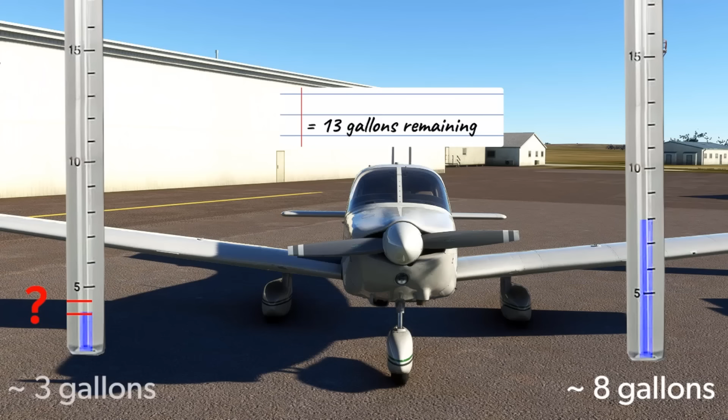Now, with no other airports within comfortable fuel range, they'll have to find a way out of this mess. None of their options are very good. Each one adds potential risk or a long delay to this trip. Let's jump into the scenario now, take a look at the different options this pilot has, and let you decide their fate.

You picked up skiing as a winter pastime in your hometown of Red Wing, Minnesota. The bluffs overlooking the Mississippi River provide a scenic enough view, but today you and your spouse will set your sights higher and head to Wyoming for a week-long getaway. You pack up the Piper Archer and depart early Friday morning with a plan to get to Sheridan before sunset.

You'll split the 650-mile journey into two legs. First, you'll fly west for about 4 hours and find somewhere to land and top off. Then it'll be a shorter leg to Sheridan with even more comfortable fuel reserve that you'll appreciate in the more remote territory. You take off, climb to 6,500 feet and head west. Every hour, your GPS reminds you to switch tanks. With a headwind averaging about 15 knots, you travel 390 miles in just shy of 4 hours and end up landing in Philip, South Dakota.

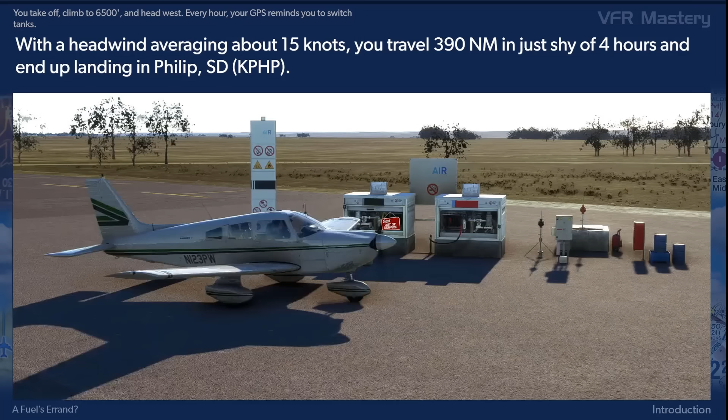You taxi up to the self-serve 100 low-lead pump, hop out, and are met with an out-of-service sign. Maybe that's why the only airplane you see on the ramp is a decrepit Antonov AN-2 that looks like it was tied down in 2004 and hasn't moved since. Inside the FBO, the airport manager informs you that the pump stopped working this morning, and for all he knows, it might not be fixed until next Monday. His call for repair services from Rapid City went to voicemail, and it's over an hour away by road.

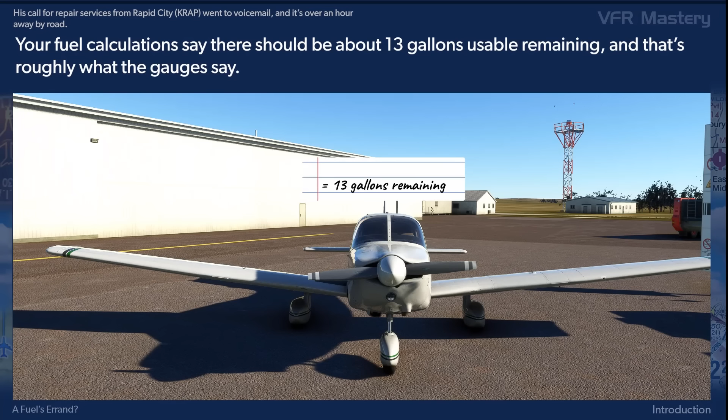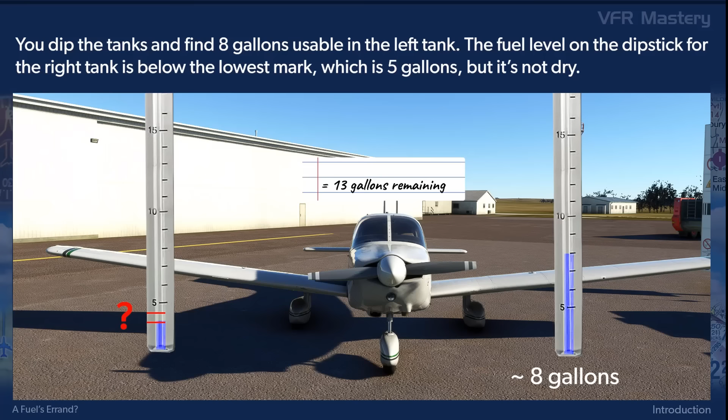Your fuel calculations say there should be about 13 gallons usable remaining, and that's roughly what the gauges say. You dip the tanks and find 8 gallons usable in the left tank. The fuel level on the dipstick for the right tank is below the lowest mark, which is 5 gallons, but it's not dry. You figure that's at least 3 usable in the right.

Rapid City is 65 miles ahead against a 10-knot headwind, so you wouldn't have a legal, let alone smart, fuel reserve. Pierre, South Dakota is 60 nautical miles in the wrong direction, but with a slight tailwind component. ForeFlight says you could get there in 30 minutes and 5.5 gallons.

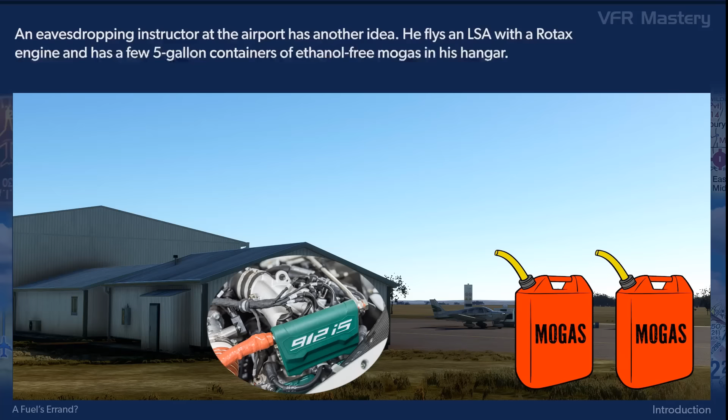An eavesdropping instructor at the airport has another idea. He flies an LSA with a Rotax engine and has a few 5-gallon containers of ethanol-free MoGas in his hangar. He'll sell you 10 gallons if your Archer has the AutoFuel STC. You tell him it doesn't. No matter, he says, it's just a paper STC, and they don't actually change anything in the engine or the fuel system. And autogas mixes fine with 100 low-lead.

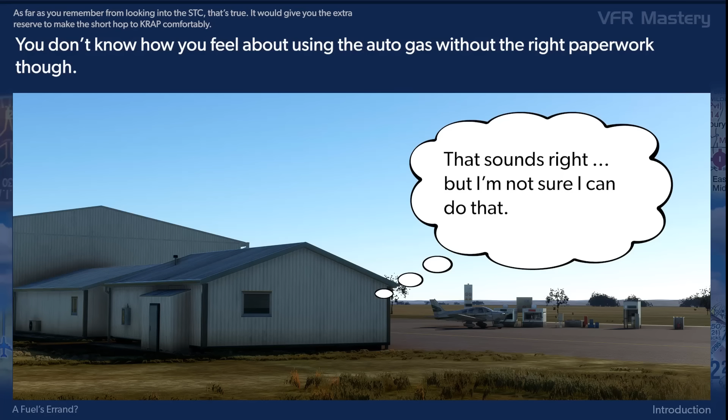As far as you remember from looking into the STC, that's true. It would give you the extra reserve to make the short hop to Rapid City comfortably. You don't know how you feel about using the autogas without the right paperwork, though. There's enough 100 low-lead on board to make Pierre with a legal reserve, but juggling between the left and right tanks is tricky. You say you wish you had taken the 172 with a both position, and the instructor suggests another workaround. He offers an empty container to transfer those 3 gallons to the left tank.

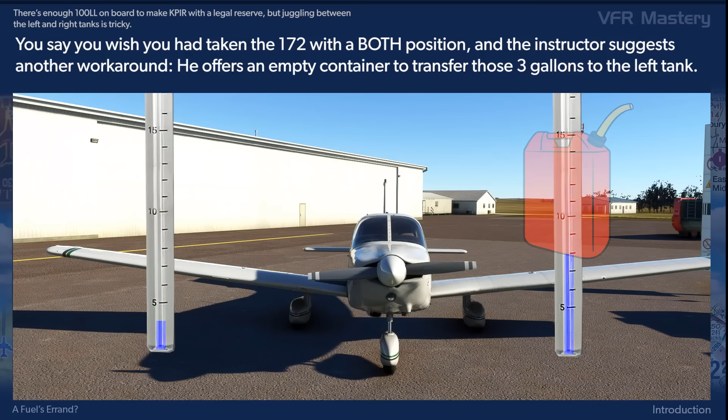Then again, if he has 2 empty 5-gallon containers, maybe you could borrow those and rent a car for the 3-hour round trip to Pierre to get 10 gallons of avgas. What will you do? 1. Fly to Pierre. Use the left tank alone. 2. Fly to Pierre. Take off on the left tank, switch to the right tank for cruise or until it runs dry, switch back to the left for descent and landing.

3. Transfer all your fuel to the left tank. Fly to Pierre on the left tank. 4. Buy 10 gallons of ethanol-free autogas, then make the short flight to Rapid City to top off with 100 low lead. 5. Borrow 2 5-gallon cans, rent a car, and drive to Pierre to buy avgas, or wait for the pump to be fixed. Analyze the resources and make your choice.

Okay, so which option did you choose? Let's see what Paul Bertorelli would do. Paul is a well-known aviation journalist and a highly accomplished flight instructor with decades of experience.

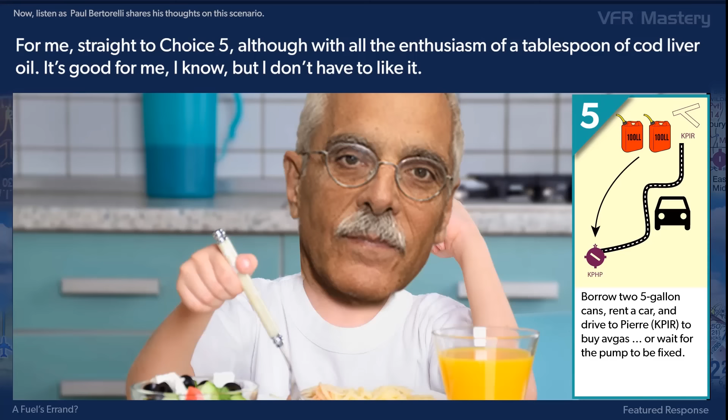Now listen as Paul Bertorelli shares his thoughts on this scenario. For me, straight to choice 5, although with all the enthusiasm of a tablespoon of cod liver oil. It's good for me, I know, but I don't have to like it. But there's a virtuous point to be made here, and I will get to it a little roundabout by first dismissing the other choices. Choice 1 makes no sense.

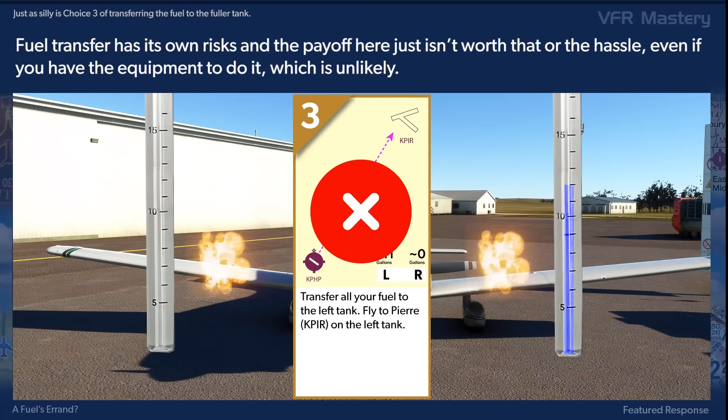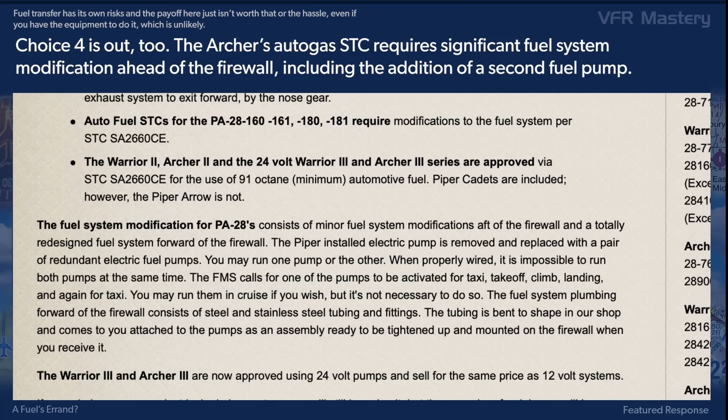Not using fuel aboard the airplane because you're worried about the tank running dry is irrational. Just as silly as choice 3 of transferring the fuel to the fuller tank. Fuel transfer has its own risks, and the payoff here just isn't worth that or the hassle, even if you have the equipment to do it, which is unlikely. Choice 4 is out too. The Archer's Autogas STC requires significant fuel system modification ahead of the firewall, including the addition of a second fuel pump. There's a reason for that, and it's probably related to vapor lock issues.

So on to choice 2. Fly to Pierre by launching on the fuller left tank, switching to the right and running it dry before completing the trip on the left tank. Seems like a perfectly reasonable and eminently doable strategy, so why not pick it then? The problem is no margin for error, or at least very little.

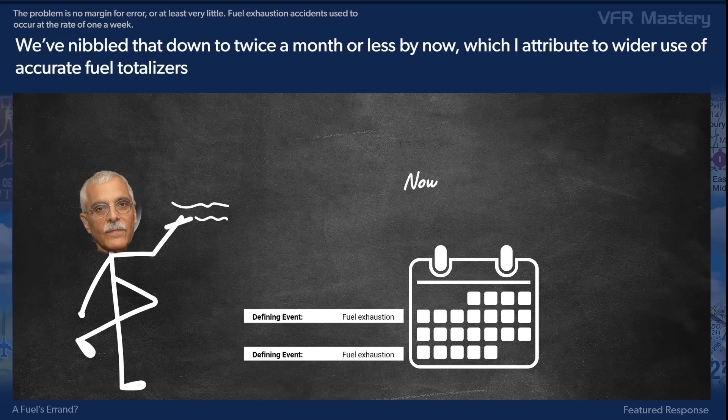Fuel exhaustion accidents used to occur at the rate of 1 a week. We've nibbled that down to twice a month or less by now, which I attribute to wider use of accurate fuel totalizers and the penetration of apps into the flight planning process, resulting in more accurate fuel awareness. All good, but the same garbage in, garbage out caution that applies to computers applies to totalizers and apps too.

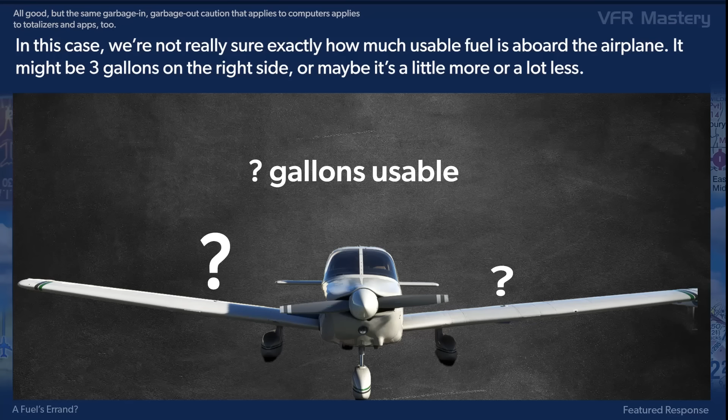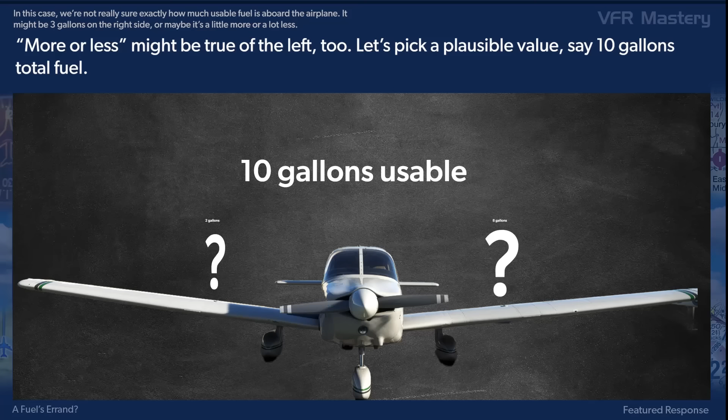In this case, we're not really sure exactly how much usable fuel is aboard the airplane. It might be 3 gallons on the right side, or maybe it's a little more or a lot less. More or less might be true of the left, too. Let's pick a plausible value, say 10 gallons total fuel. ForeFlight says the Archer will need 30 minutes and 5.5 gallons to reach Pierre. I'm going to round that up to 6. That would leave a bare 4 gallons aboard, just enough for 30 minutes reserve at economy cruise.

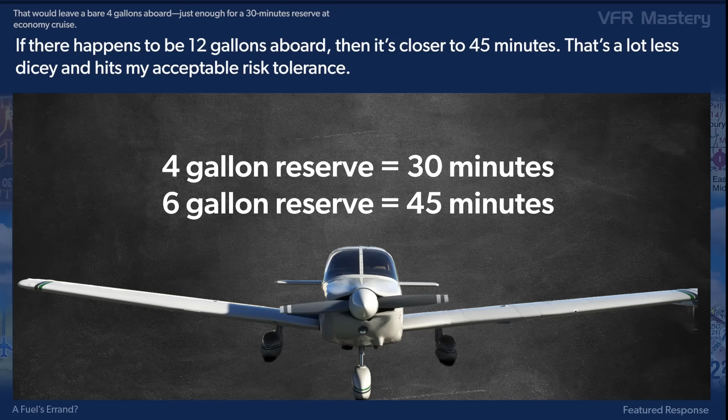If there happens to be 12 gallons aboard, then it's closer to 45 minutes. That's a lot less dicey and hits my acceptable risk tolerance. But with 10 gallons, the flight becomes do or die. If we can't make it into Pierre for whatever reason, there are no alternates without running the airplane on fumes. And what exactly is the payoff for this minor risk? A few more hours of skiing? This is the classic fuel exhaustion setup.

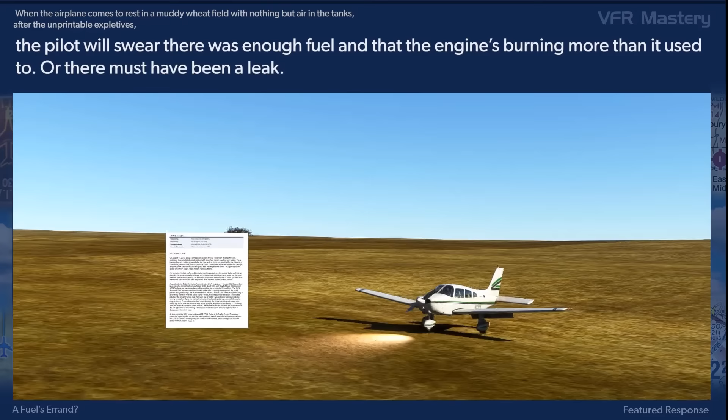When the airplane comes to rest in a muddy wheat field with nothing but air in the tanks, after the unprintable expletives, the pilot will swear there was enough fuel and that the engine's burning more than it used to, or there must have been a leak. Accident investigators and FAA inspectors have heard every imaginable variation on the theme.

The alluring thing about choice 2 is that it's not galactically stupid, it's just on the jiggy side of a little sporty. If I knew the airplane well, had run both tanks dry before, knew exactly what they held and how much remained in them, then I'd consider the risk acceptable in daylight and in good weather. Otherwise, no. And now, at the risk of becoming utterly insufferable, comes the high virtue the scenario begs to illustrate.

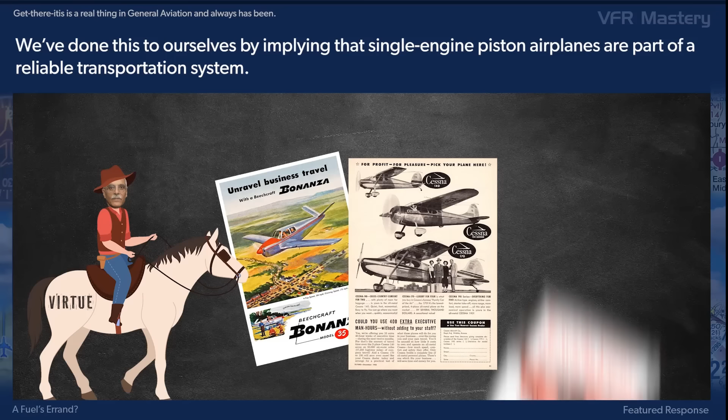Get-there-itis is a real thing in general aviation and always has been. We've done this to ourselves by implying that single-engine piston airplanes are part of a reliable transportation system. Aviation magazines used to run stories with headlines like, "We beat the airlines." But the reality is GA trips are subject to sharp limitations, and this scenario shows two of them: limited range and uncertain infrastructure.

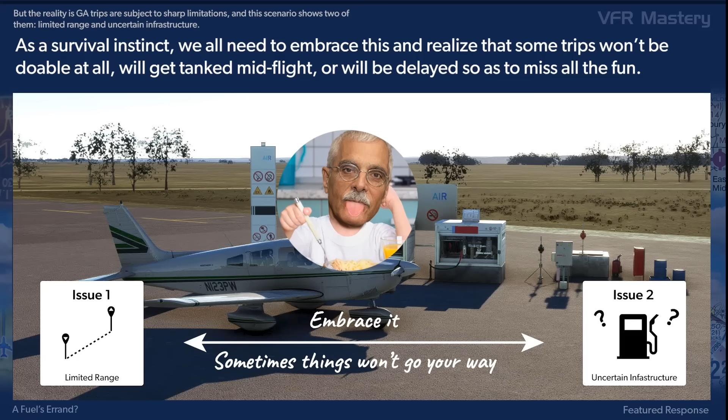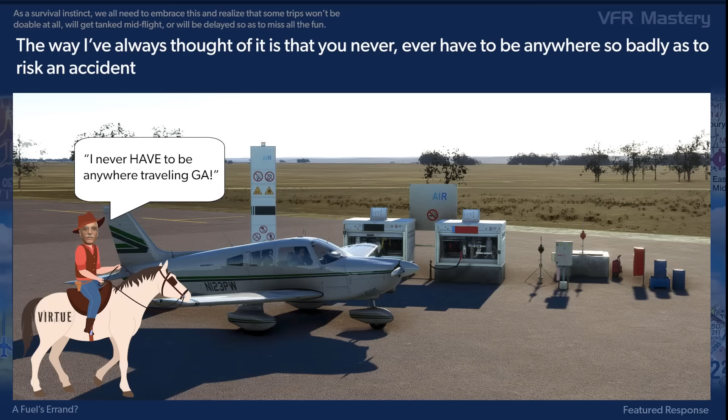As a survival instinct, we all need to embrace this and realize that some trips won't be doable at all, we'll get tanked mid-flight, or we'll be delayed so as to miss all the fun. The way I've always thought of it is that you never, ever have to be anywhere so badly as to risk an accident. Not your sister's wedding, not a funeral, not your 30th high school reunion, and least of all, a day of skiing.

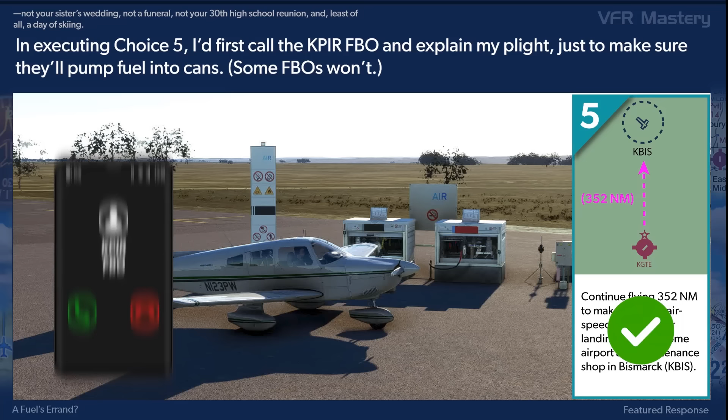In executing Choice 5, I'd first call the Pierre FBO and explain my plight, just to make sure they'll pump fuel into cans. Some FBOs won't. Then I'd casually ask if there might be someone around who would bring 10 gallons of 100 low-lead over to me, either in an airplane or a car, for the appropriate amount of dead presidents, of course. Can't hurt to ask, right? It could save a couple of hours. If no, I'd rustle up the cans, find a car, and make the schlep myself. I always have a good audiobook on my iPhone for just such eventualities.

Okay, so this is a good example of why it's important to plan for all possibilities, especially on a long trip like this. Hopefully this exercise got you thinking, and that's always the goal of our VFR Mastery program.